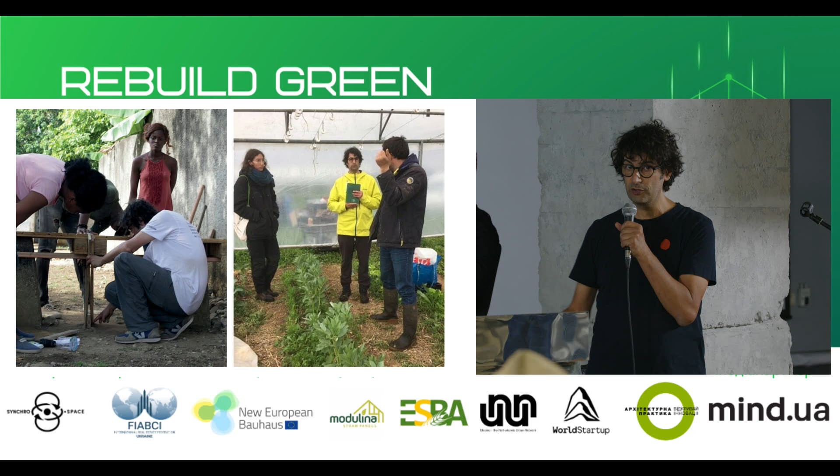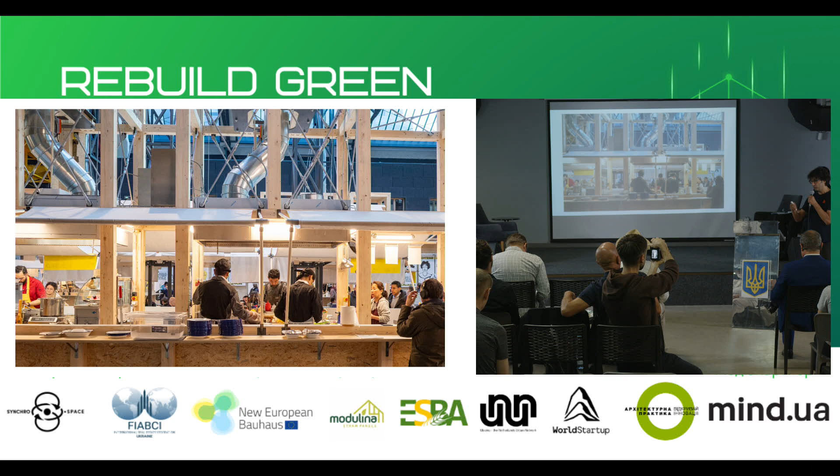Our office uses a lot of wood, and we have this motto that wood is more friendly for building. But of course, you don't do wood alone. First we have an office called KOZ. We're about 10 people now. We work 4 days a week, which also shows that architects are taking a bit more care of themselves.

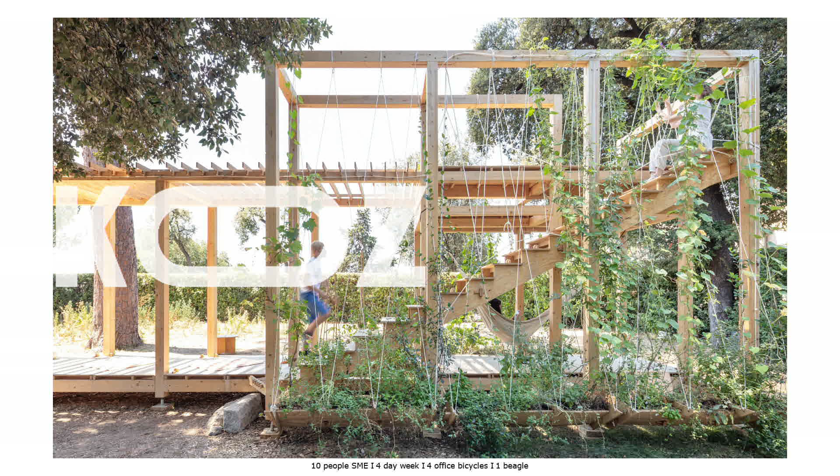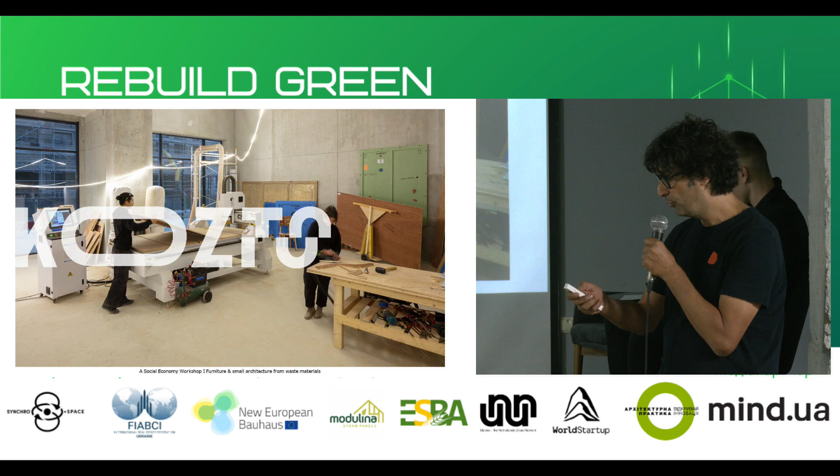We started also a new factory, a small factory called Kozito, because we wanted to see what we could do with leftovers from the wood coming from our construction sites. It also shows that it's pretty easy to go from the BIM and all the software that we have as architects and transfer it to these cutting machines, which don't cost so much, which are lightweight, that you can transport. Having these sort of pop-up factories is certainly something to be thought of for the future.

And then we have a non-profit, which is why I was here, called Cosplay. Our relationship with Ukraine started last year in Bordeaux. There was a big congress on wood construction.

And we put together a bunch of 30 architects, carpenters, all in professional schools, coming from Ukraine, from France, and from Japan. They had this task of imagining very simple solutions that could be easily built, that could improve the situation of displaced people, be it in Ukraine in the present conditions, but it could also be after climate disasters in Japan or in France.

We love wood a lot because it's this material that is living, that is sensible, that wears. The older it gets, if you take care of it, the better it gets, the more sensible, the more comfort it brings to the people who live in it.

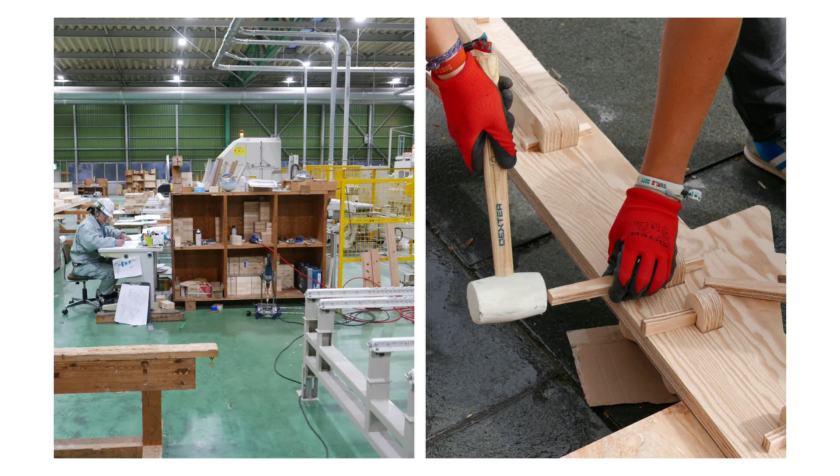So there is this very emotional relationship to wood. It's also a great thing because it brings together super traditional know-how and super technological things. You have this incredible factory in Japan making 5,000 houses a year, operated by maybe just 10 people. And with the same tools, you can reuse medieval techniques of assembling wood without nails or glue or whatever.

I hope I'm not going to bore you. I'm going to present a few projects relating to sustainability, also showing how they fit into the larger frame of all the stakeholders.

This is something I did because I realized that we've been working for 20 years and we have been completely overwhelmed by a number of laws, codes, and referentials like BREEAM, LEED, and things like that. And when you go into sustainability, at some point you really have to cope with that as an architect, because they are providing guidelines.

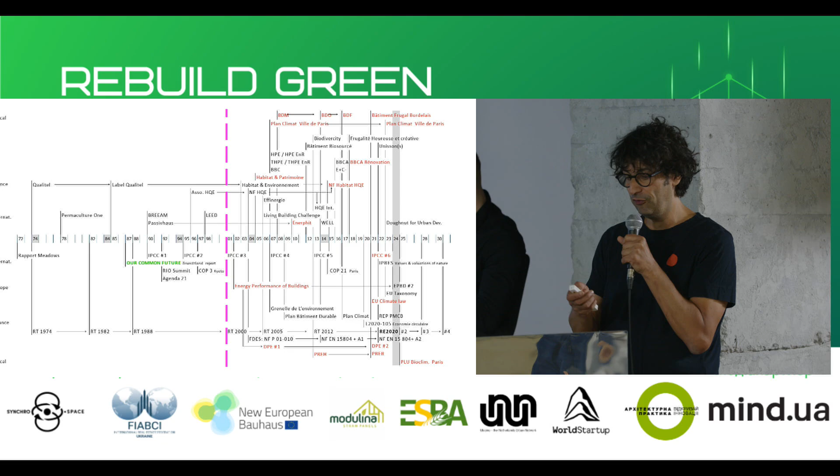And in the end, there's also something that is required to get the budget, which can be important. When the first project we did in wood in 2001, as you can see, there was not really much happening regarding sustainability prescriptions in architecture — be it the bottom part, which is really law, meaning what you have to respect, or the upper part, being more like references, guidelines that are not mandatory but that people choose to apply.

What's interesting is that you can see that at some point, law has been a bit messy, almost as messy as the upper part, because we have to translate — we have the European law, we have the French law, we have the international law. So really, all these things are piling up.

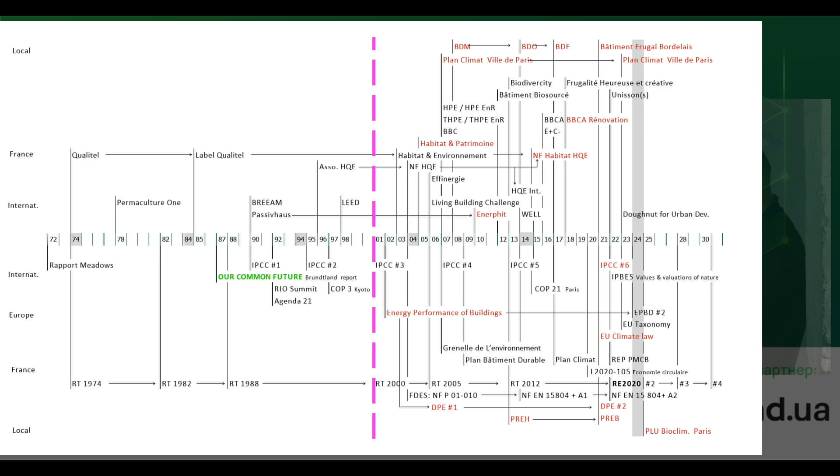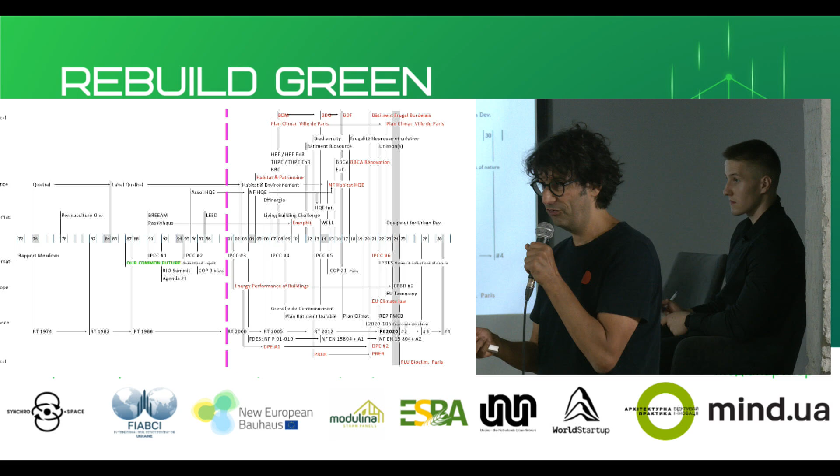What's pretty interesting is that in the last years, all the advances taken by voluntary programs like Living Building Challenge or Passive House are beginning to be applied in prescriptive laws. So I'm also going to talk about how it applies in France regarding something called RE2020, the French energy regulation. It's interesting because it's one of the first times in the world that you legally regard the environmental impact of buildings not just during operation, but across the full life cycle analysis. So all the operational aspects are taken into account, which is pretty tricky to do.

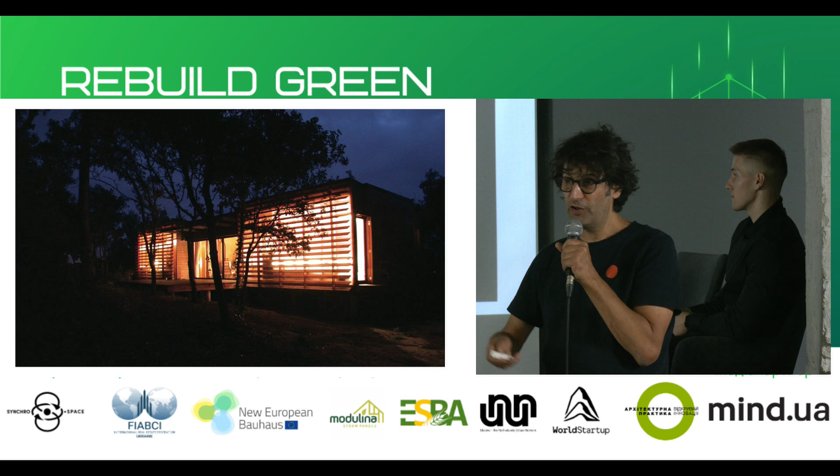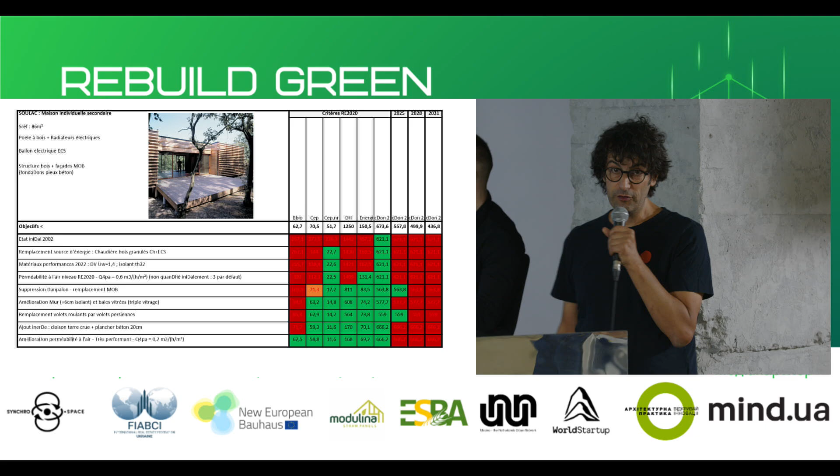Our first building in wood was this pretty nice little house. And when this new law arrived, we decided to fact-check all our previous wood buildings to see how they complied. This was built 20 years before the law, and it doesn't work—it's a nightmare. You might think a wood house is naturally sustainable, but not necessarily, because there are so many aspects to sustainability: electricity consumption, water treatment, insulation, materials. In the end, we would probably have to redo it totally if we did it now.

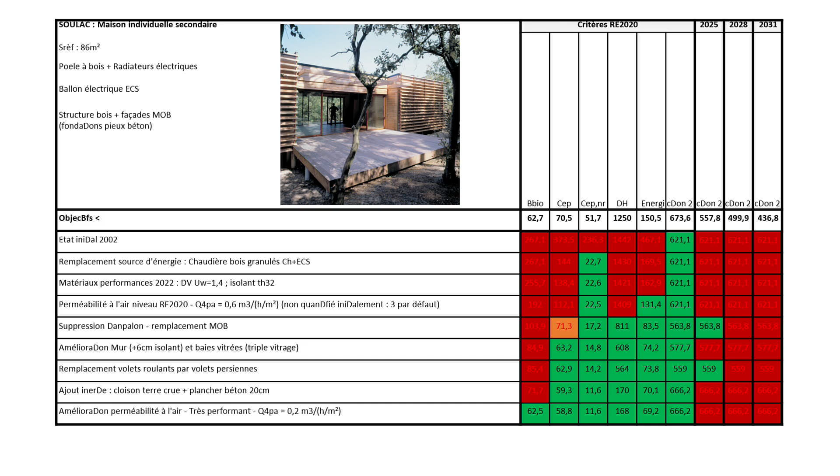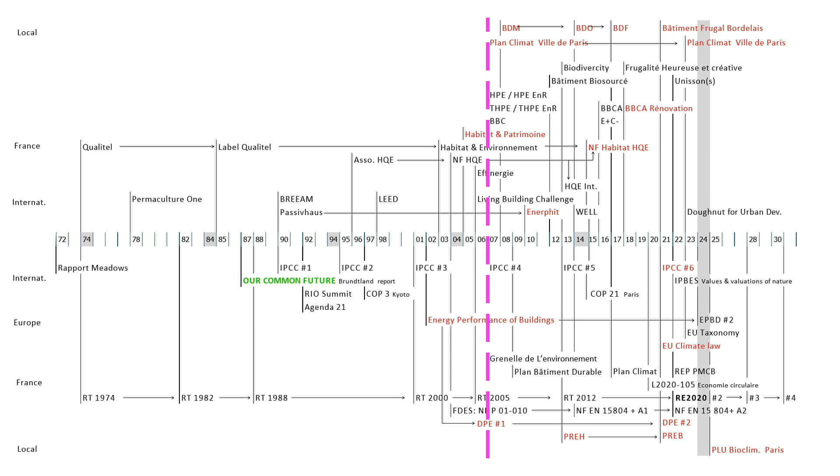We gained a bit of know-how on wood construction and wanted to raise it to more ambitious programs, mostly social housing, which is a super important subject in all European cities. So in 2006, we won a project in the city of Paris.

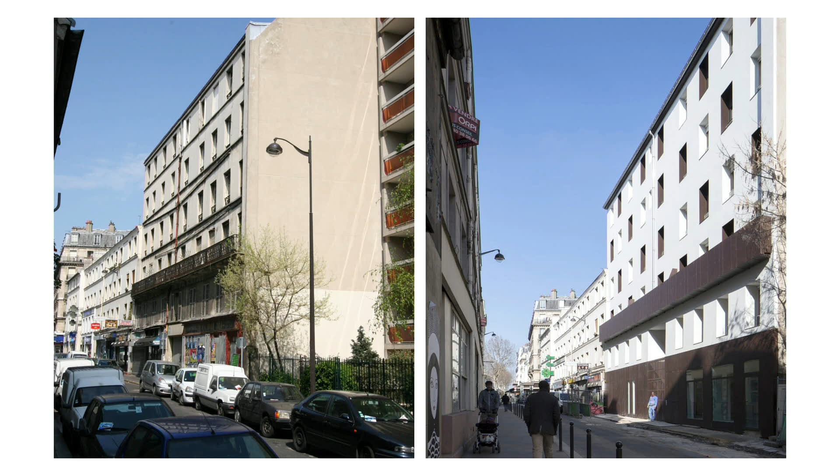What's interesting is that it touched both sides of sustainability: first, what do we do with heritage—what do we do with this old Parisian housing on the street that is totally uncomfortable and has no insulation? Our answer was to put external insulation. We redid a lot of stuff to bring it up to standards.

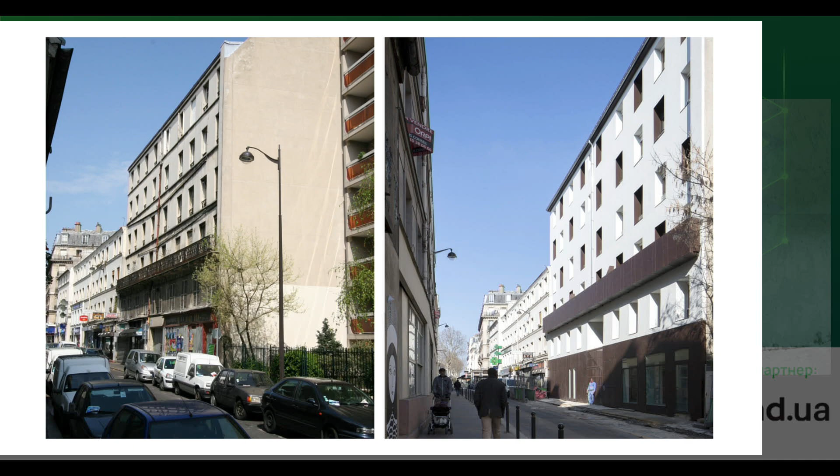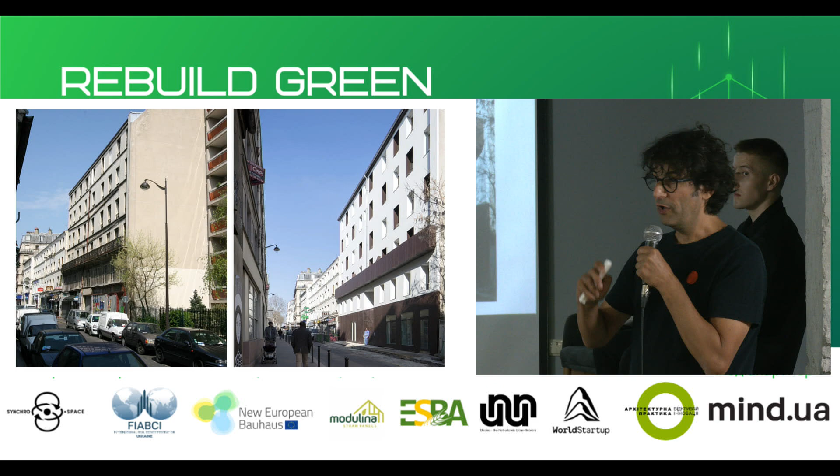And this was a demand of the city of Paris. I'd like to insist on this: our experience in France is that sustainability improvements come from the cities. They are usually the body that leads, that has all the links between stakeholders—builders, voters, developers. They are the ones able to push things on a faster track than bigger institutions like the government.

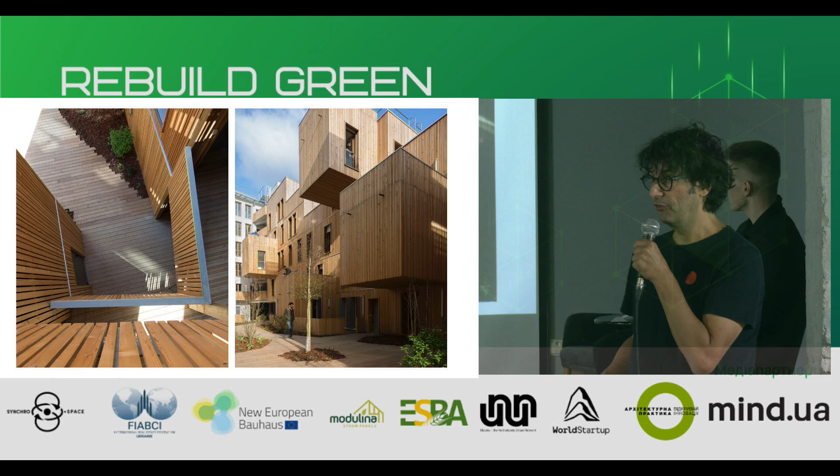Then, of course, what was interesting about using wood was that we didn't have to bring so much impact on the backyard to build this nice housing totally made of wood. Lots of technical issues, but we're really proud of it.

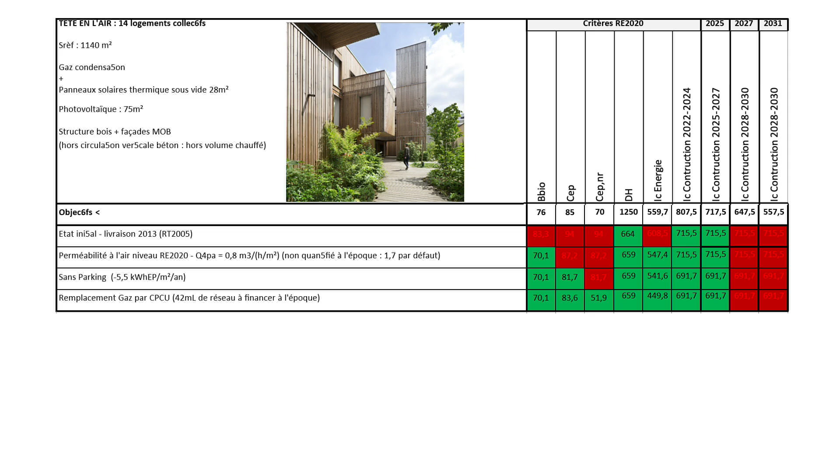And things improve now—it's with little things that are now in the Parisian building code, these are the three red things. We were able to cope with the national building code requirements up until 2027, meaning we designed in something 20 years ahead of national law. That's very important when you talk about sustainability, bio-based and earth materials: everyone is talking about objectives for 2030, 2050, but when you go to natural materials, you're already fitting into that frame. So it's really important to go there.

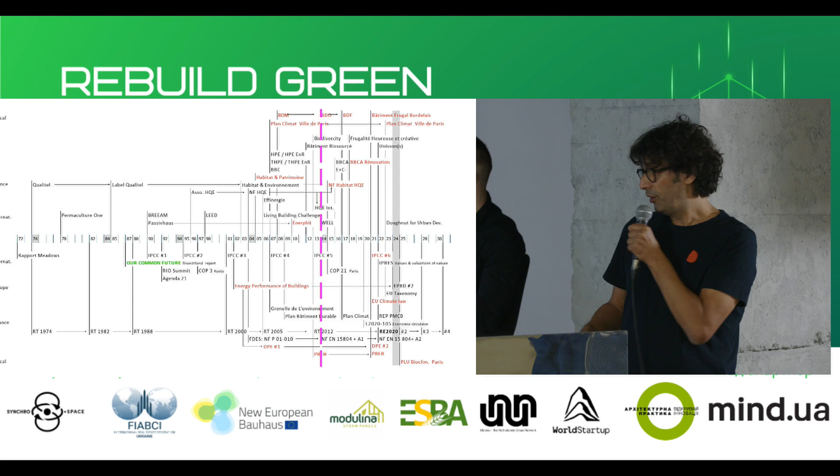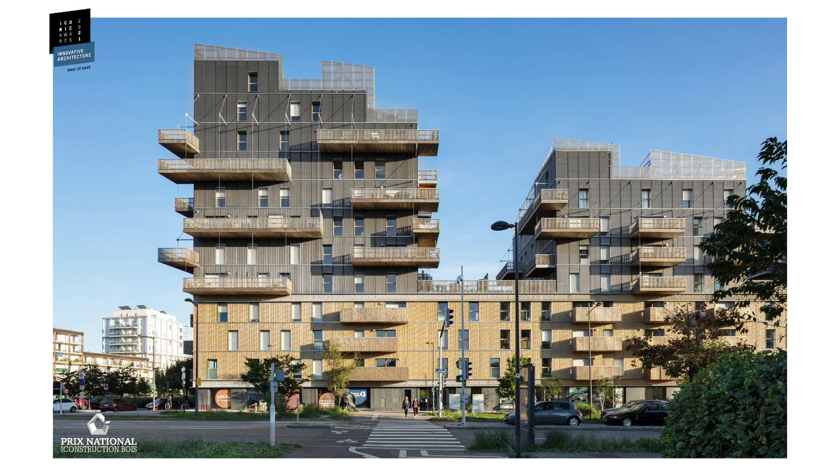One of our projects a few years later went really higher—this is in Strasbourg, 12 levels, totally CLT, with absolutely no structural concrete. But then remember all the adding of laws, regulations, codes, and so on—it was a super tricky thing to bring that into an area that also has seismic activity issues.

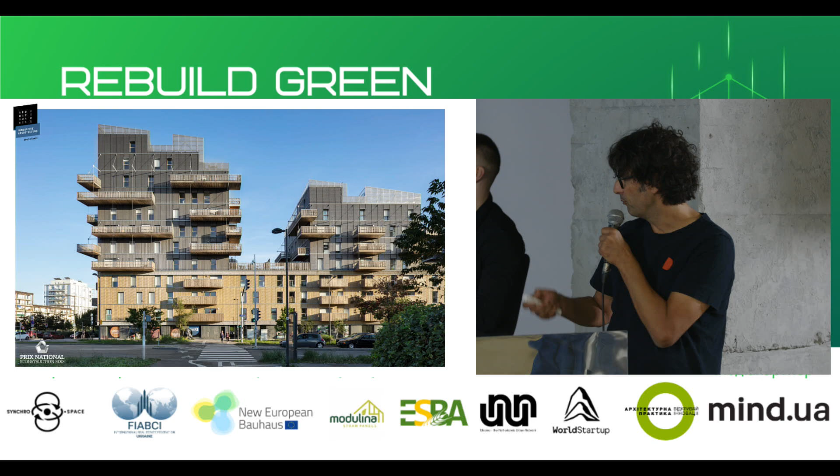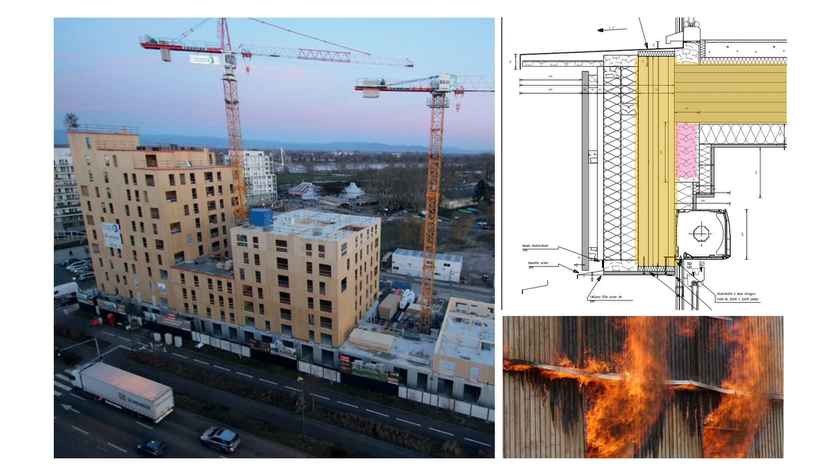There's also a lot of issues regarding sound—acoustics is a very important thing. Concrete is wonderful for blocking certain types of sound between spaces. When you use more lightweight materials, you can get a lot of interaction between rooms if you don't treat it correctly. So there's a lot of engineering with these natural and vernacular materials to bring them to the expected level of comfort found in the codes. The funny thing is, once again, you find this tension between innovation—super technical CLT requiring a big factory—and traditional know-how.

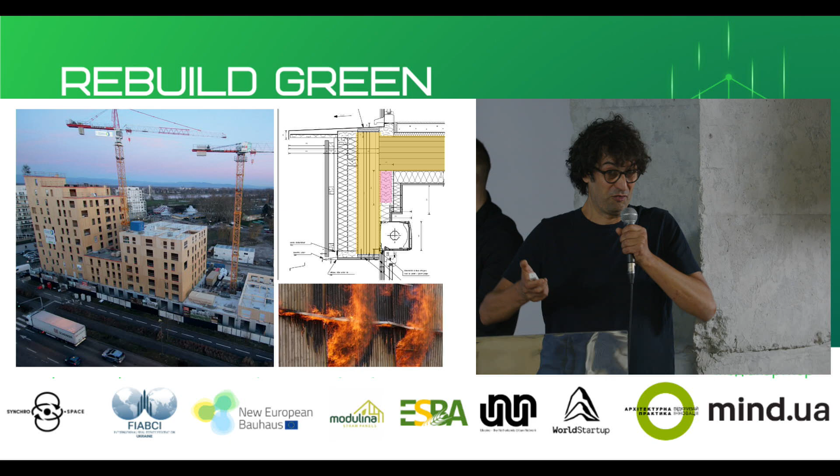No computer was able to calculate how the metal connectors between the CLT panels were going to react in case of an earthquake. So we were stuck for maybe a year because we could not get the building permit. Then the carpenters said, oh yeah, usually to do that we just add this little pink piece of wood, we screw on one side, we screw on the other side, that works. Since this is considered a traditional technique, you don't have to make the computer simulation.

So innovation comes really with this mixture of tradition and new techniques. And now, wow, a building that was designed in 2014, 10 years ago, is already complying with regulation going till 2030, which means pretty much in advance.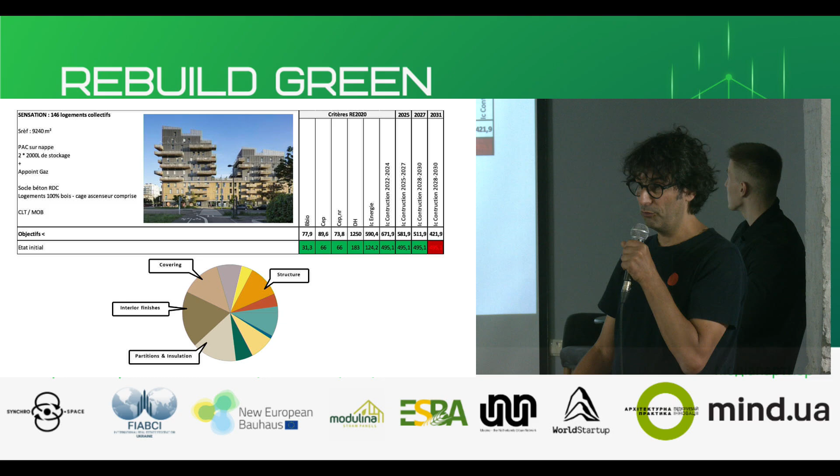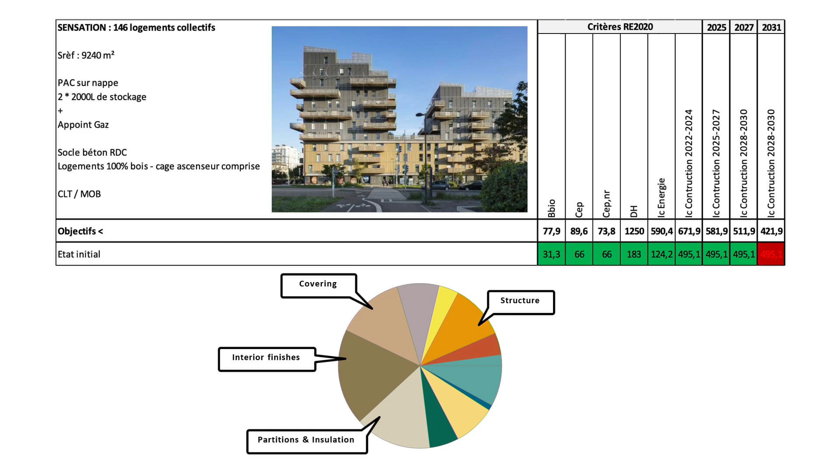There's one thing we really regret on this one - you showed the picture of the building with straw insulation nearby, that goes to 7. We couldn't make it with straw, basically because of the earthquake, because of the extra weight it would have added. It would have overcomplicated things. But if we had been able to bring straw insulation or another bio-based material, we would be complying with a 2031 regulation with this building.

I also like to insist that not all the comfort comes only from the wood. There's also a lot of sustainability techniques that are becoming more and more important. One we used here is geothermal energy to heat the water, but also to cool water going into the floors during summer to compensate for high temperatures due to climate change. And it works pretty well.

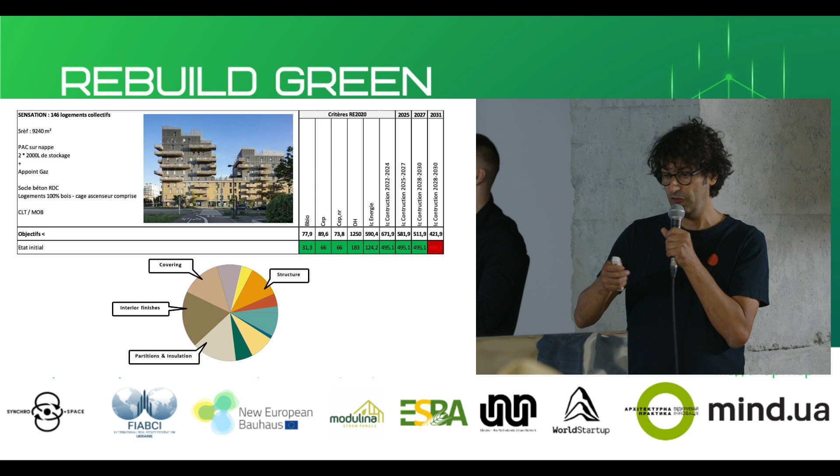It's the same technique we used in another project, even bigger, just delivered this year - the Olympic Village for the Paris Games. We were part of a huge team. Just for celebrating the fact of winning the competition, there were 100 people that had worked on it. So it's a huge, huge team.

Once again, the challenge was going to more massive production, and also being able to cope not with nice carpenters like we used to, but with big general contractors from France who are so used to concrete that they have difficulty moving to sustainability. There's a lot of pedagogy to do because they're also the ones investing - investing in the machines, having to transform how the workers work. So there's a lot of responsibility that everyone involved in sustainable construction has in bringing people to new practices.

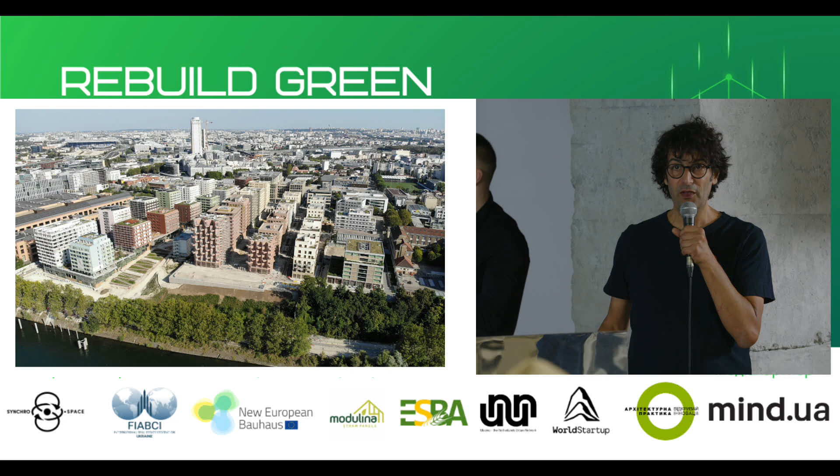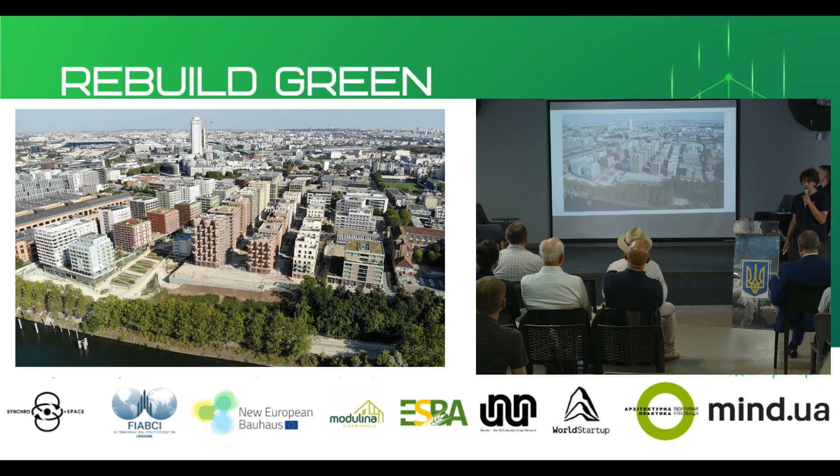It was pretty tense at some point, but all the lower buildings, the two rows on the right, are all wood construction. Here the challenge was: we have a short schedule, a short cost to hold, and six architects who all have their architectural fantasies - but we have to find a building system that will fit all the proposals of the architects.

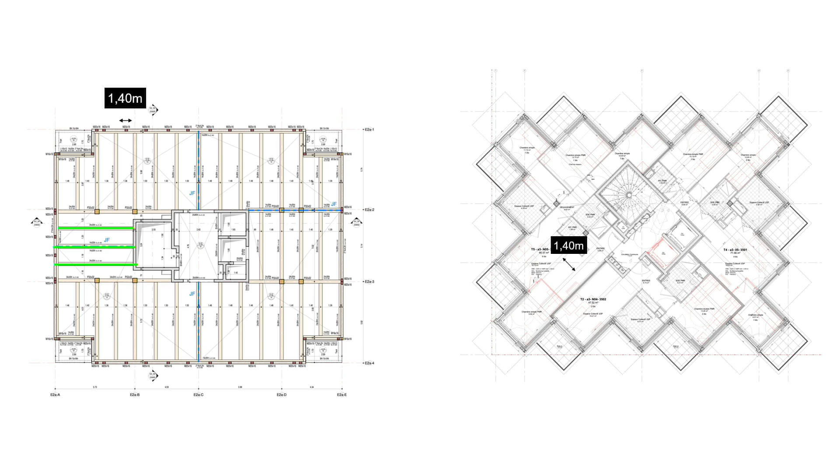This is also something that happens when you get involved in sustainability - you get outside your role. We're not just architects anymore, we're facilitators, moderators between other architects, between builders, between the client who is becoming impatient, between the state, the government of France who wants the most sustainable Olympic Village.

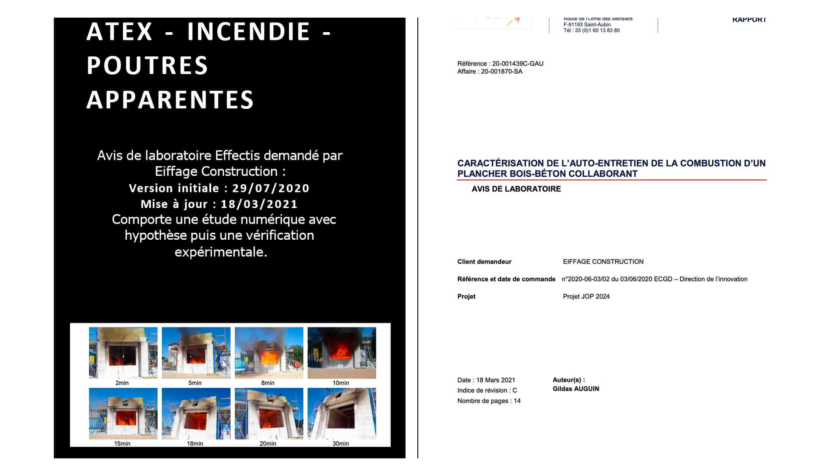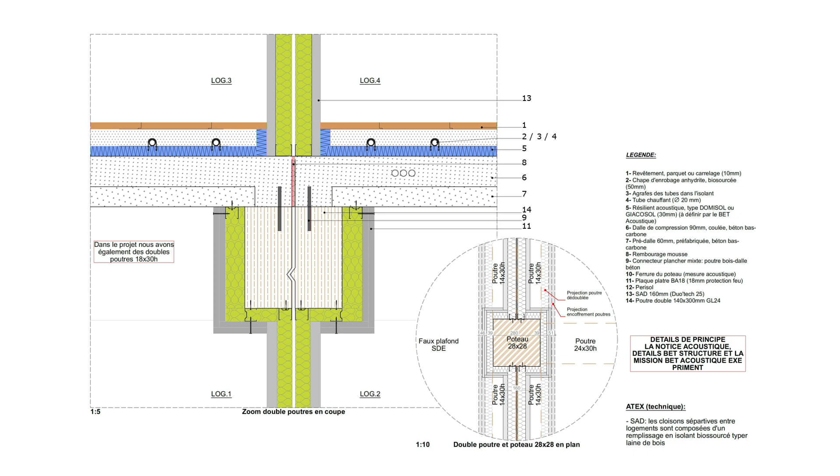And once again, if you want to go further, like having different types of materials on the facade, we have to do all these tests of burning, of making mock-ups that will be sprayed with water to prove they are watertight and nothing is happening inside. So it's always good, when you go to something innovative that sounds cool, that maybe you saw happening somewhere in the world, to take time to prove it works. I'm going to be a bit faster.

So this is the construction, there's concrete floors. What's funny is that it's exactly the same building system that we use for making this huge office building near Paris. And this is the end. One of the intentions was that at the end, you don't know that it's built in wood. It looks just like a Parisian thing that has been there in the city all the time, and having wood inside.

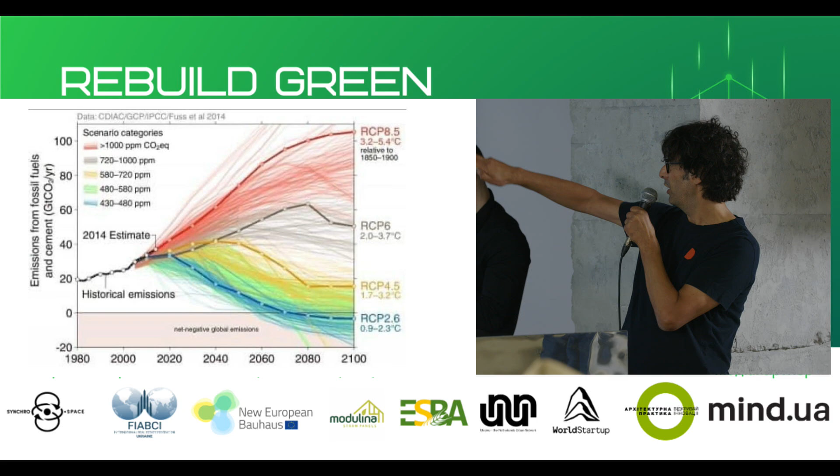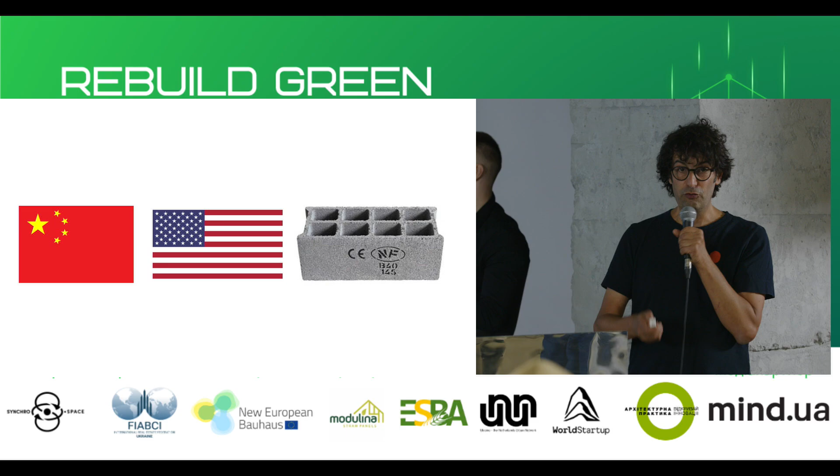Now, the thing, of course, is that that's super nice. It's beginning to rise, but basically regarding climate change, we still are not really on the good track. We are still globally on the red track, which is going to super high rise of temperatures. And of course we use wood, but you may know that the third greenhouse gas emitting country in the world is called cement, just after China and the US. And it is used worldwide, and it is an incredible issue.

Because we are facing two tasks worldwide. One is renew what has been built, because there's been so much matter and so much CO2 emitted to build all these things in concrete. And the other one is that there is still a huge pressure to build new things, and this incredible thing that we are building one Paris city a week, one New York a month, and one Tokyo a year, actually.

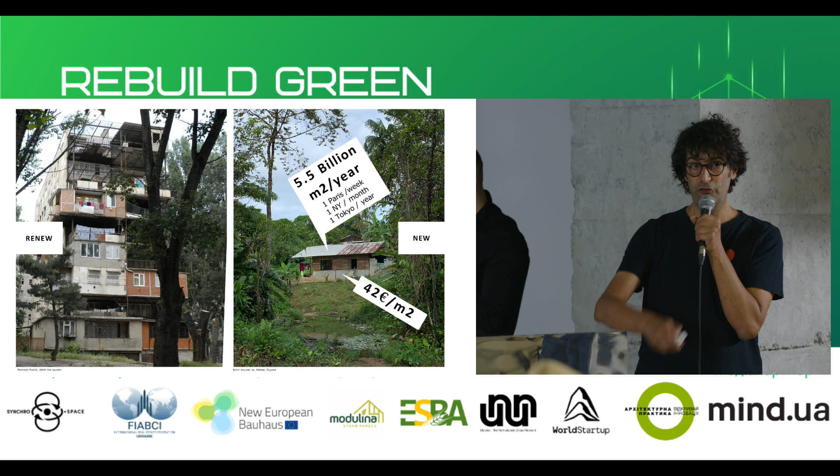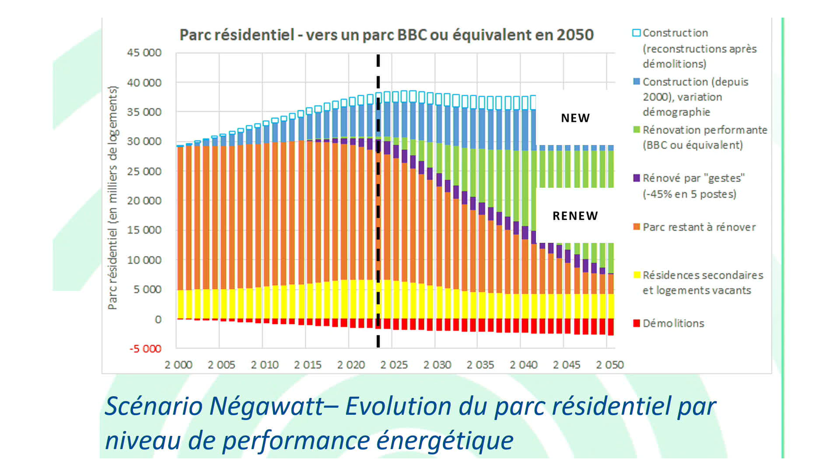So the needs are incredible, and it's really a challenge to shift from the cement industry to more sustainable ways of building. And this shows it at the scale of France. You are here, and the blue trend is what is going to be built as new until 2050, and then you have renew on the bottom. So basically this is the same situation in all European countries and in a lot of other countries in the world. We have to shift to what do we do with what exists already.

And we also have to take a lot of care of the waste. Even wood, when you say it's sustainable - that's when we were in a factory in the forest in Africa, we realized they were burning one house a day just because there was no market to use all this wood. We made this study with them to see what were the quantities, and you realize that, okay, it requires a little bit of work, but with something that basically is just burned, you can start developing building materials that could be used more locally.

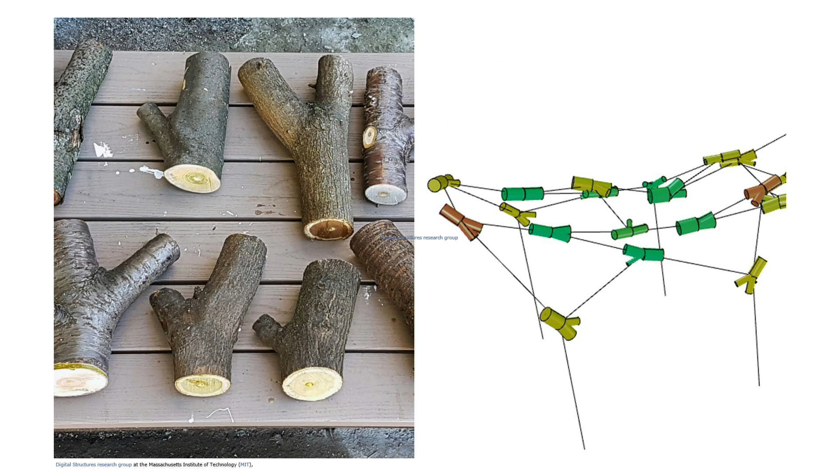There's a lot of interesting studies also made in the research departments. This one is done by MIT, using all the forks of the trees, which are the strongest part of the tree, and just modeling them and using them in parametric design. So maybe these are also things that can be thought about.

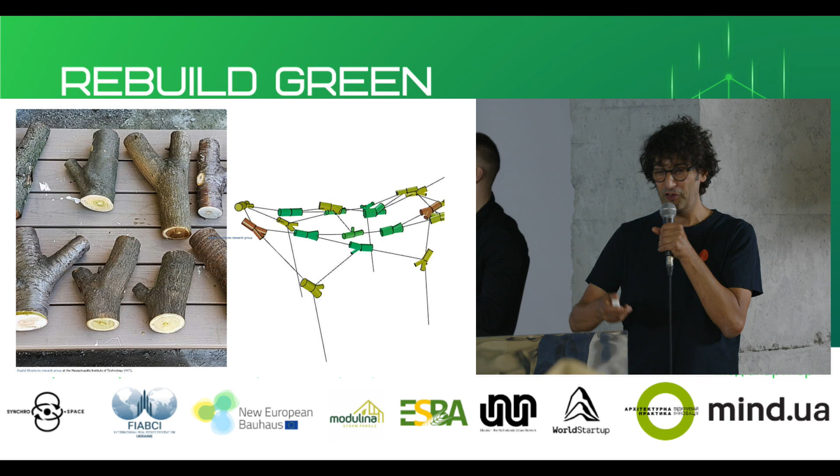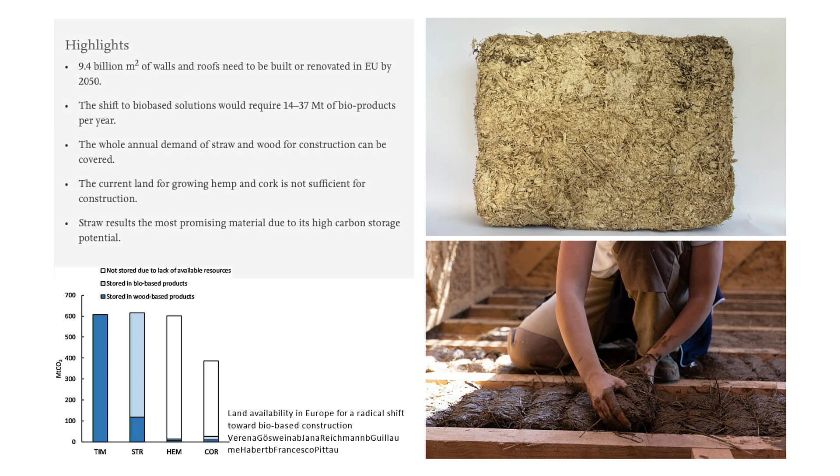And then, well, you talked a lot about straw, and of course there is adding to wood - we are really concerned about that, bringing more natural materials. There was this study made for Europe showing that basically, when you look at all the materials, timber and straw are the two materials of the future on the scale of the European continent. There's a little bit of hemp, but it would be better to keep it for clothing to replace cotton. That's the main point.

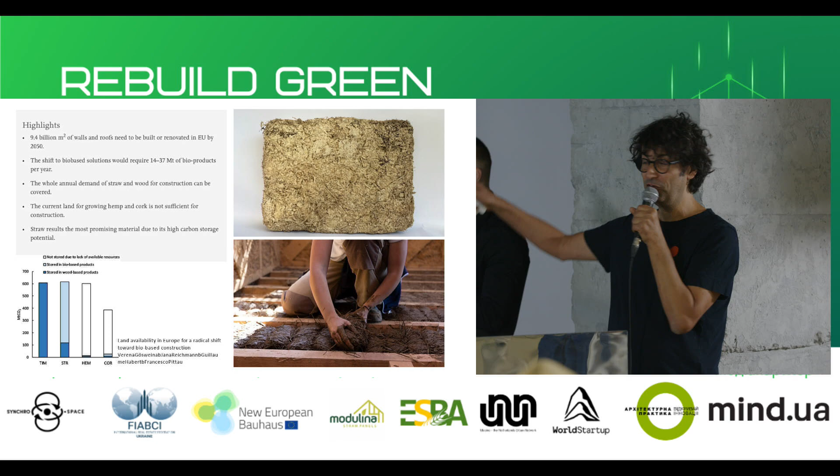And then there are a lot of other materials, like we're developing right now a sort of hemp-lime system with residues of sugar cane in the Caribbean. It's a bit the same thing as using straw, using residues of agriculture. The thing is that we are in France, so it's super easy to make this block and prove it works. But then now we're going to have all the fire tests, blah blah blah. That's sometimes the problem with the regulation.

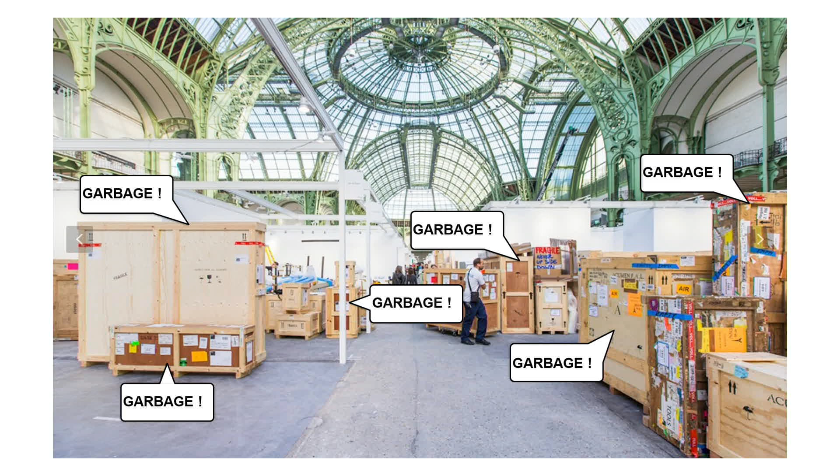And then there's also all the garbage, the things that are thrown away. In our venture Costo, we are taking all these art transport crates. There are tons of them - in France, they make 10,000 of them every year. And basically, once they come back, they are burned because it's a waste, and nobody wants to take them. We just take them, and with a machine, with people, you can transform them into furniture, little things that come inside the building.

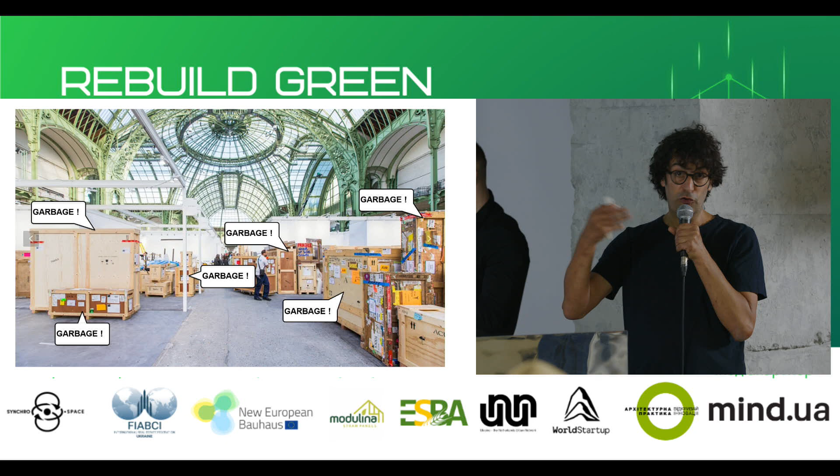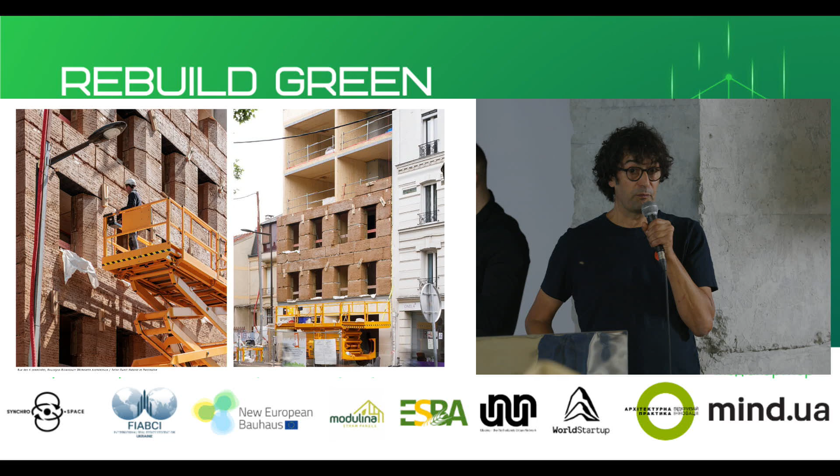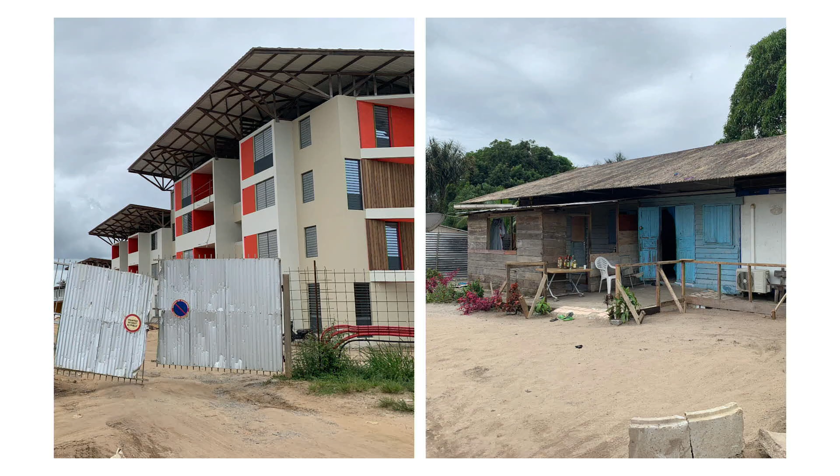And then when you talk about sustainability, people are important. We had a chance to make a competition in French Guiana, which is near Brazil. And they have a sort of paradox because they build social housing like this, which respects all the codes of France applied to this area.

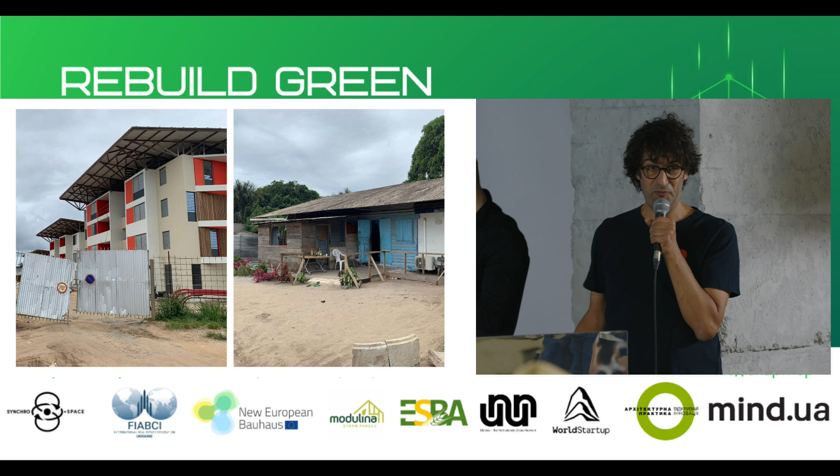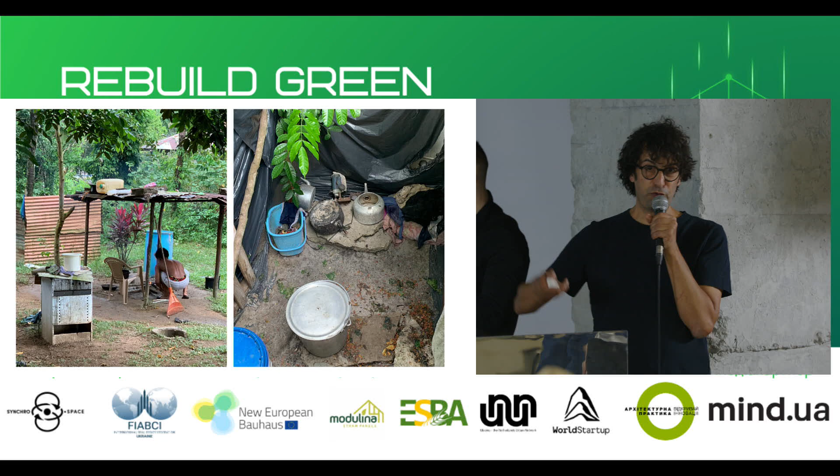But people would prefer to live like this, because in these new buildings, you are not providing them with things that fit their culture, their way of life. Just two examples: a lot of these people just go to the forest to hunt. When you bring a crocodile or a 3-meter snake into a social housing apartment, it's pretty difficult to cook it, believe me.

They have rituals. There's a sort of cleaning ritual you have to do when you argue with your neighbors, and this is done in a small place like that. There's no place like that in social housing. And you could go on and go on and go on.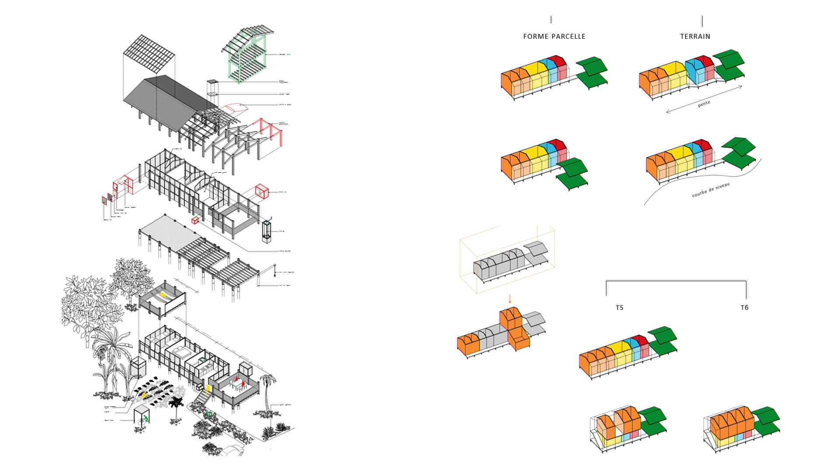Because of course, the objective was to lower the cost completely, so that really, really poor people who are now living in slums could afford to pay the rent for these types of housing.

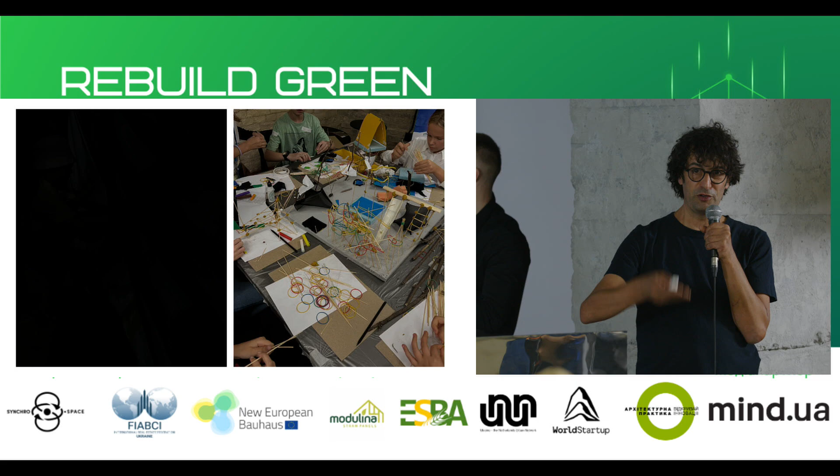And well, that's what we also tried to do here in Ukraine, with the teams you saw at the beginning. It was so emotional last year in Bordeaux, the moment we spent with the 10 young Ukrainian architecture students. We had such strong bonds that we made this vow: next time we are doing something together, it's going to be in Ukraine. And we managed it, which is pretty extraordinary, really.

The project we are working on is to design a new playground for children on Trukhaniv Island in Kyiv. The process we did, we managed to have just 2 weeks. So the first thing was to find children, and the city of Kyiv helped us. This also shows the idea of involving local communities and local stakeholders.

We brought them for 2 days onto the island and into a space, asking: okay kids, how do you want to play here? What do you want to play? They made these incredible models and presented them. And then we had to work out what we were going to do next.

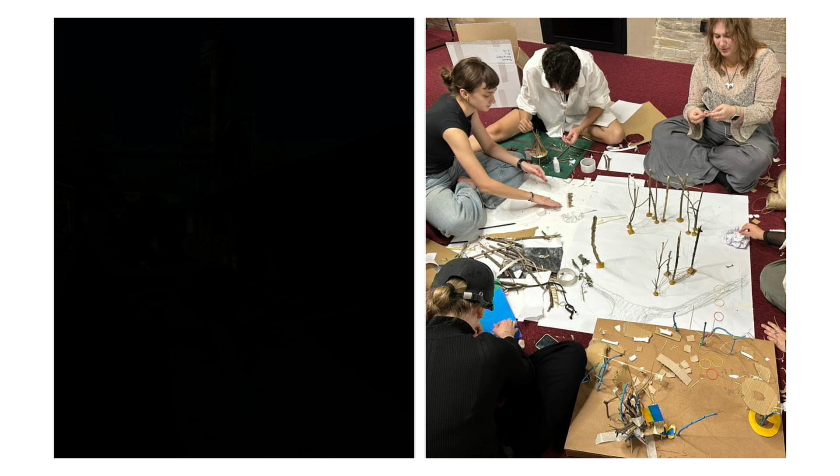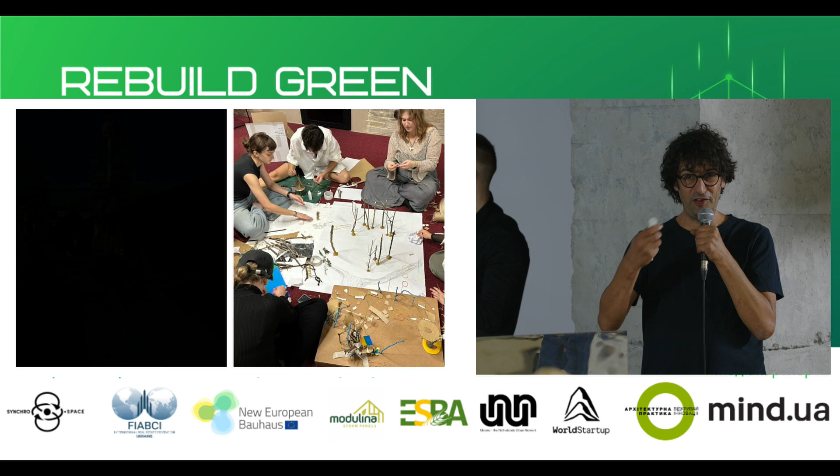So, well, we went a bit like kids. We continued working on their models, trying to understand what they had said to us, interpreting it, making models ourselves. And then finding a resource.

So once again, thanks to connections, we found a sawmill not far from Kyiv, and we spent 2 days there just taking the trees they have and cutting them to the dimensions they can do, and making the design with those dimensions.

And this was supposed to be the last one of the project, but it finished yesterday. It was amazing. We built all the things that the kids imagined, a sort of small pavilion trying to interpret their ideas. Like when a kid tells you, and there were a lot of them saying, we want to fall into a river with a crocodile, or we want a swimming pool, or we want a cave of fear.

Well, as an architect, I don't know what a cave of fear is, so we tried to have a proposal for that. And yesterday, they all came to the site for a little ceremony to practice the place. We're going to work all year with them to get further and further, until the final construction, which will hopefully arrive next summer. Thank you.